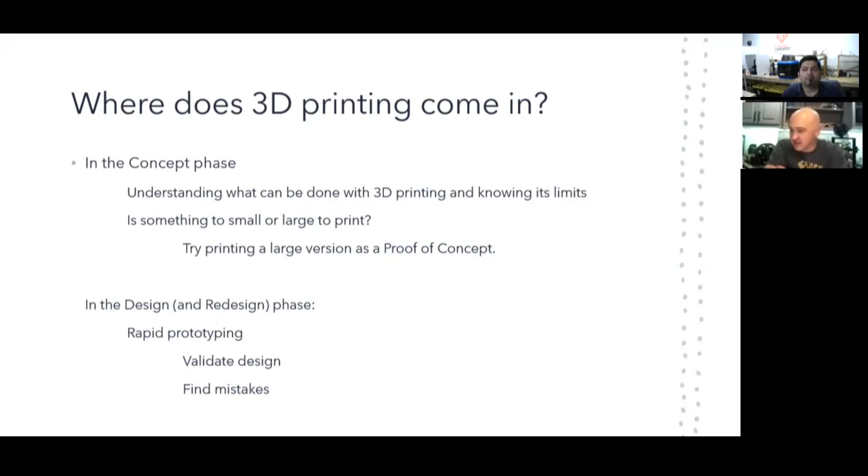So for me, 3D printing is just a godsend when it comes to prototyping in general. I can't even imagine doing it without it. So my idea was to have a baby changing table. In this case, I wish I had one that was small enough I could take it with me.

It had to be, I had my own little parameters I came up with. It had to be small enough and portable enough to take it with me wherever I went. And that's where I didn't find anything on the market at all.

So this is the final product. You can see it's nice and small.

You can see it's, let me back it up a little bit here. So in this case, it actually folds out. You can see there's a couple compound hinges here. It folds out and locks into place, and it's a solid, rigid frame table.

And in this case, you belt it on like so. There we go. Belt it on, and there we are. See if I can get a little taller here. There we go. So that's been weight tested to hold over 100 pounds. Based off this current design.

And your back would never hold that. I hope, I would never really want to try it, but the design, after a few iterations, was strong enough to hold. And I can show you in some of the weight testing pictures I had where they were actually testing that.

So this was the final product. And in my case, I can show you the more specific parts where I had to prototype, right there: these hinges. These complex hinges, in this case, they lock in place.

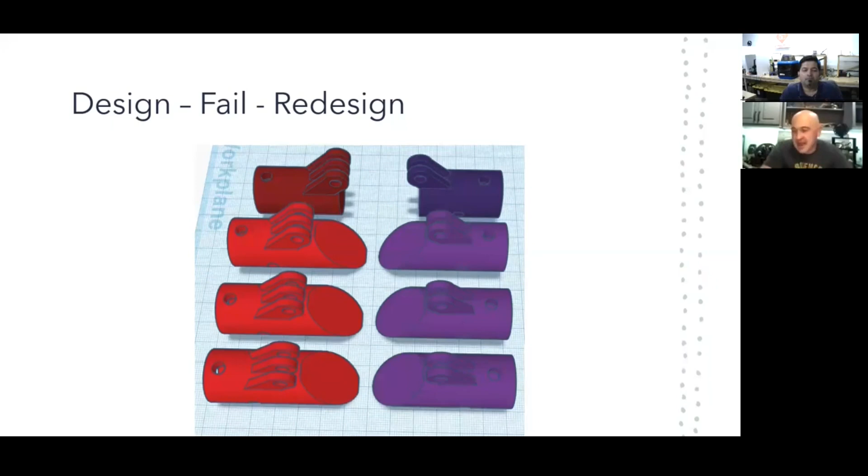And I realized very quickly that when you get a baby on there, those are dangerous pinch points. So I decided to retry this as a circular hinge.

Okay, so this was some of my hinges. You can see the inside of these a little bit, when I was talking about how there's like a male side and a female side.

This side will rotate through the groove and actually hit this point here and stop and allow it to stop rotating. I modeled this on half inch outside diameter tubing because that's literally just what I bought at my local hardware store. So even now, that's what I use because that's what all my models are out of.

So this was one of the results of those prints. And one of those, you put it together, I'm all excited to see how it works. For the first time, I see that it actually folds, and this is pretty neat.

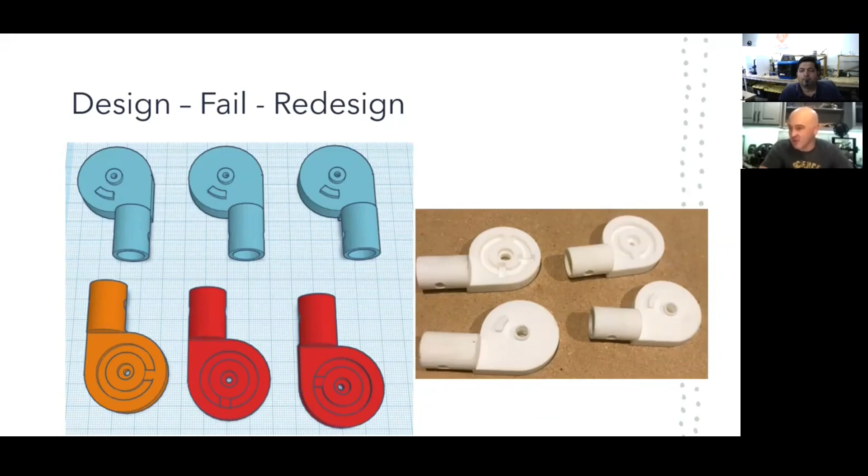It might actually work. And they were so flimsy, they probably couldn't have held more than 10 pounds, and they were just bowing and bending. So next step was, were these first prototypes all out of PLA?

Nope, they were ABS. I believe, because I had those printed by shapeways.com. And I think I just chose ABS because I didn't know anything about the plastics, and I've learned quite a bit about them now.

But yes, those were ABS. They offered a bit of flexibility, but yeah, they were too flexible, really.

Right, so I tried making these larger to make them stronger, and I also added a bit of a gap here so that when the hinges fold. And I followed this through on my final design too.

Let me pull out some of my fabric and show you. When the hinges fold, they actually sandwich each other a little bit, so I needed a little bit of a gap. They couldn't just close with zero room in here. I had to plan that out so that when they fold, it took off a few more inches of the final product. So that's what I was going for here, with a little bit of a gap.

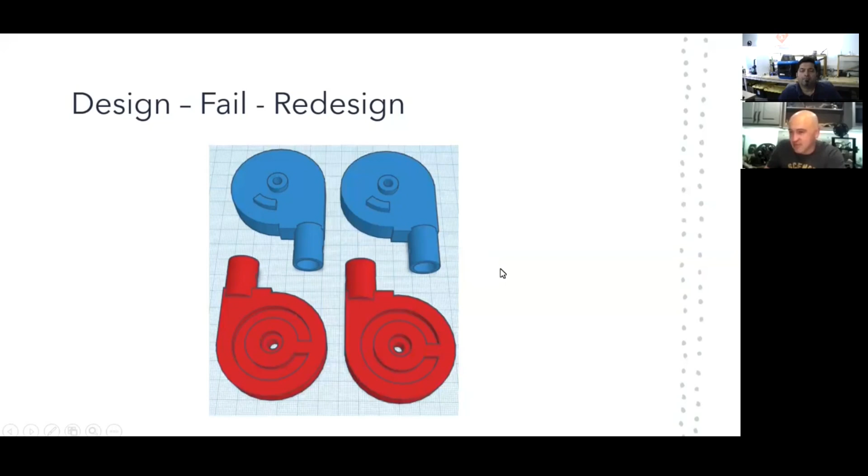Again, the same size, roughly the same size hinges. Yeah, pretty much total failure because they were way too weak and too flimsy. So then I stepped it up a notch.

I liked the idea of the round hinges. There were no more pinch points to deal with. So this is a much more hardy design, and it's much closer to my final product. You can see I actually have two separate hinges, one for the 90 degree rotation and one for the 180.

The interesting thing for me is that you went from a round pipe holder to this kind of square one. Yeah, that's because my 3D modeling skills were not that good.

This was done in Tinkercad. If you've ever used Tinkercad.com, I recommend it. It's a great way to throw together shapes, and considering the complexity of what I did here, I think it wasn't half bad.

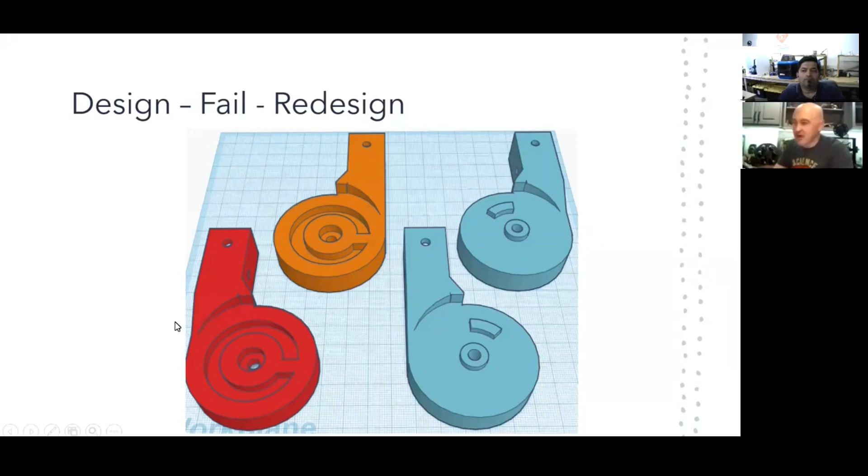No, I mean, I know, we primarily use Tinkercad. It is my go-to tool as well when I just want to get something done very quickly. Exactly, it's so intuitive. Kudos to Autodesk for Tinkercad. Oh yeah, AutoCAD's a whole different monster, and I knew nothing about it. This is trying to get through my job, get through family life, and also try to learn 3D modeling. Tinkercad's a great go-to for that. Yeah, I completely agree.

With that design, I was actually able to do some 3D prints and get much closer to my final product. As you can see, I'm literally just bolting the metal tubes on. In this case, I had to learn so much about rivets and snaps and all sorts of things that I didn't even know what I was looking for.

I literally would go to a stroller or a car seat and look at a part and be like, what's that part? I need one of those. I need that little pin that does it. I had no idea what it's called.

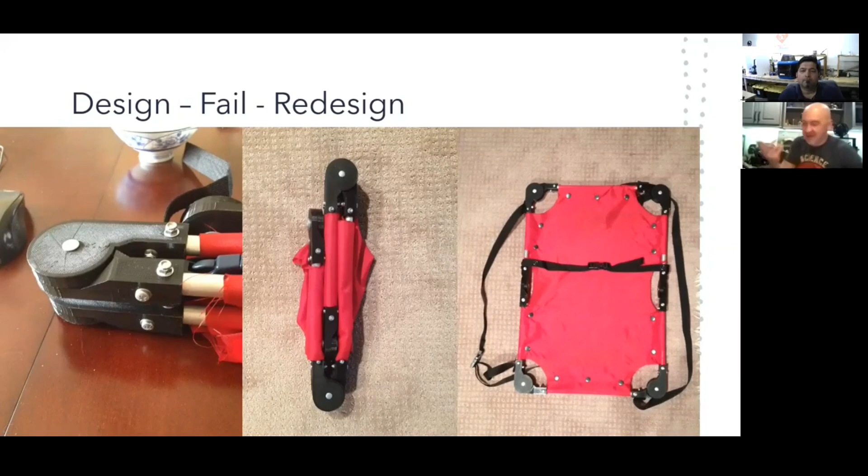So there's the final after injection molding. That's what the final hinge looks like. And like you were saying, going back to some rough designs when you're just trying to get something working, that's basically all I did until the final. At the very end is when I started putting the polishing touches.

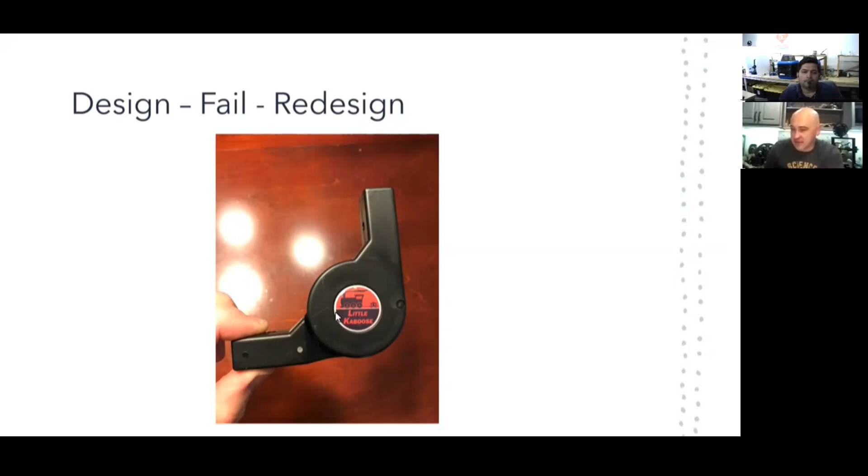Like for instance, my little sticker I have on both sides that covers my center pin. And I think I was telling you, all said and done, even if this product never goes anywhere for me, or if this particular business never goes anywhere, I learned so much from this process.

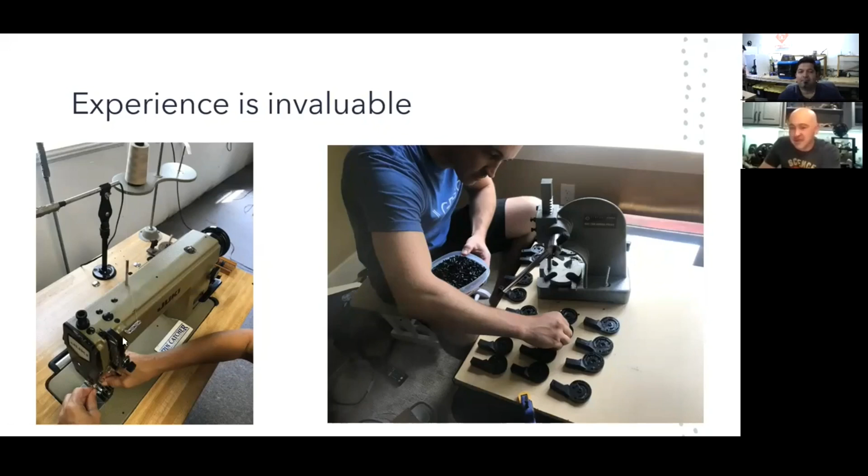This picture here is actually my mother teaching me how to sew. Oh wow, I could sew this fabric. It's just so much inventiveness you have to do just to kind of get by sometimes.

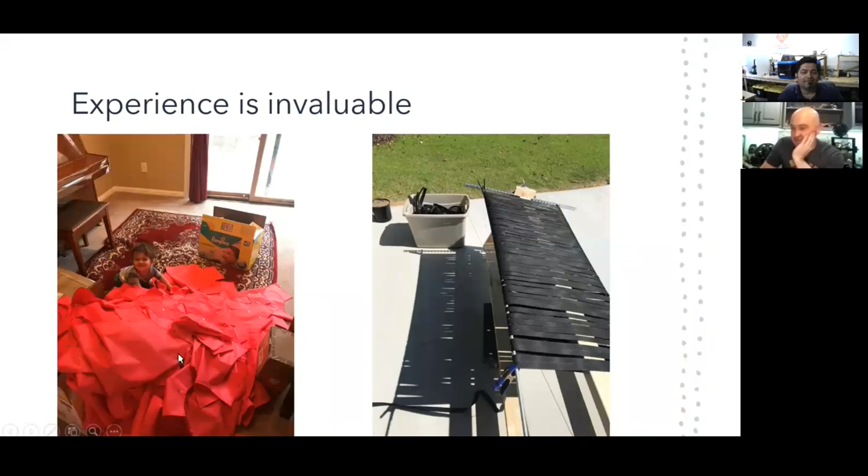Of course. Here's my old son just playing through loads and loads of fabric as I've sewn them, cut them, put snaps on them. So that's pretty much my product from start to finish, kind of how I went through the process.

Like I said, it's not everybody's process. And coming from no experience to trying this out, it was worth every bit of it, really. All of it was invaluable to my takeaway from what I learned about it all.

It's fantastic to hear your journey, and the fact that you didn't give up, especially with the patent, because I could see a lot of people saying, oh, there's already a similar patent, we're not going to try it. It's great to hear that you didn't give up, because finally you did get your patent. So that's a big win.

This is awesome. Any special notes you want to talk about? I know we did say that 3D printing assisted, but were there any comments, thoughts, or observations about how 3D printing impacted your process, other than the fact that it's fast, that you might not have mentioned so far?

Just the printing process, it's such a delight to actually see it happening. It's hard to describe how fun it is to watch your piece either being made or finally done. Watching something go from an idea to a picture in software, to an actual tangible item, it's hard to describe just how fascinating that is.